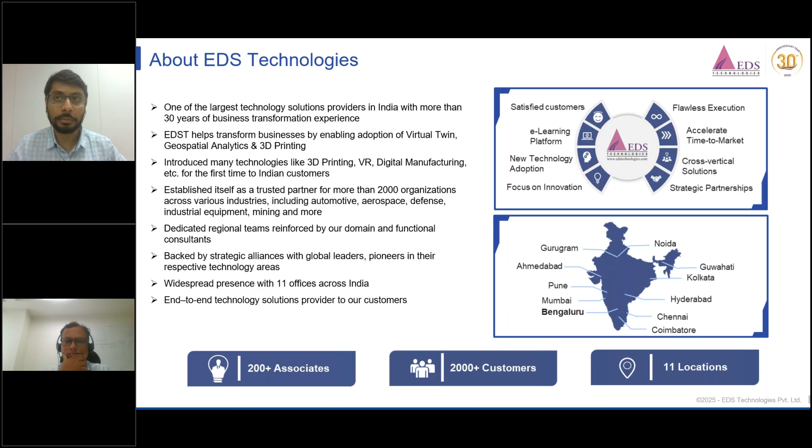This is a brief overview of our offerings as a company. We provide the 3D Experience platform solutions for 3D modeling, CATIA for 3D modeling, Simulia for engineering simulation, Enovia for enterprise collaboration, and Delmia for digital manufacturing.

We also provide RAMSIS, which is a software from Humanetics for ergonomics simulation, which is what today's webinar is about. And we also provide a product called QChecker for checking product data quality.

In addition, we also provide 3D printing solutions - metal, polymer, and electronics 3D printing solutions. Apart from that, we provide electronic design automation solutions and optical design solutions from Synopsys. We have mining solutions as well from Dassault Systemes, and military simulation and training solutions specifically directed towards aerospace and defense segments.

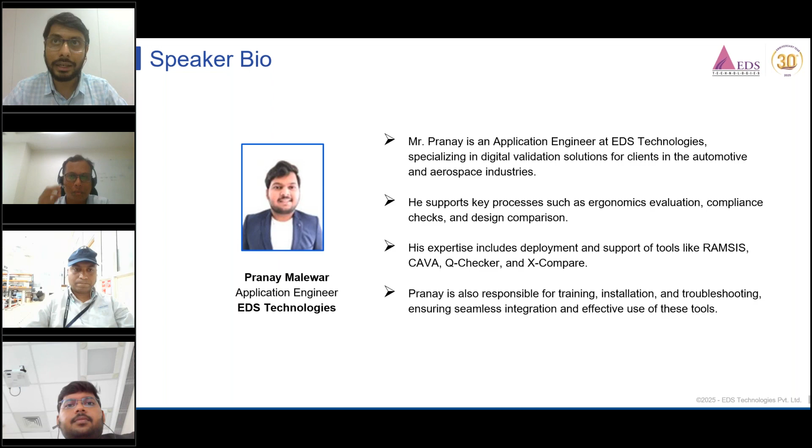We will also be having a demonstration of the RAMSIS application, which will be done by our next speaker, Mr. Pranay Malewar. Pranay is an applications engineer at EDS Technologies, specializing in digital validation solutions for clients in the automotive and aerospace industries. He supports key processes such as ergonomics evaluation, compliance checks, and design comparison. His expertise includes deployment and support of tools like RAMSIS, CAVA, QChecker, and XCompare. Pranay is also responsible for training, installation, and troubleshooting, ensuring seamless integration and effective use of these tools.

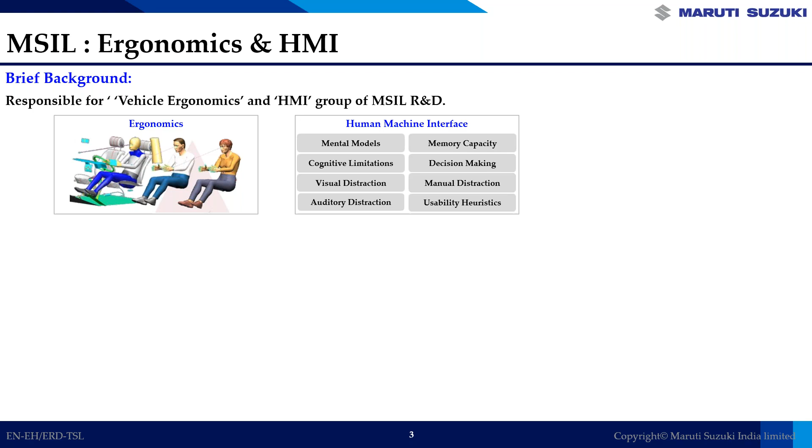My role is to define the ergonomics performance of a vehicle to ensure customer delight and joy of mobility. How do we do it? By maximizing the interior space and postural comfort and minimizing the physical and mental workload of a user.

As ergonomists in India, we are dealing with a unique challenge. We are the seventh largest country in the world, around 1.4 billion people from north to south, eastern to western border. The user anthropometry is different, food is different, culture is different, and all this diversity reflects in the behavior of the user.

And these behaviors affect the driving preferences or driving style of users. The people driving in the coastal area will have different driving preferences than the people driving in the Himalayan region.

Apart from this, there is unfortunately diversity in the road conditions also. There are world-class highways - we have Samruddhi Mahamarg and the Delhi Mumbai expressways - and there are roads which you can hardly call roads. They are bunches of potholes.

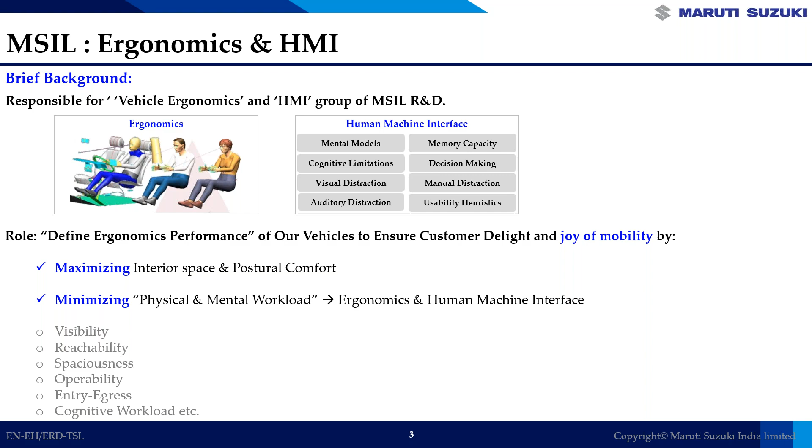So, how will we address these diversities? We are making in India, creating for India.

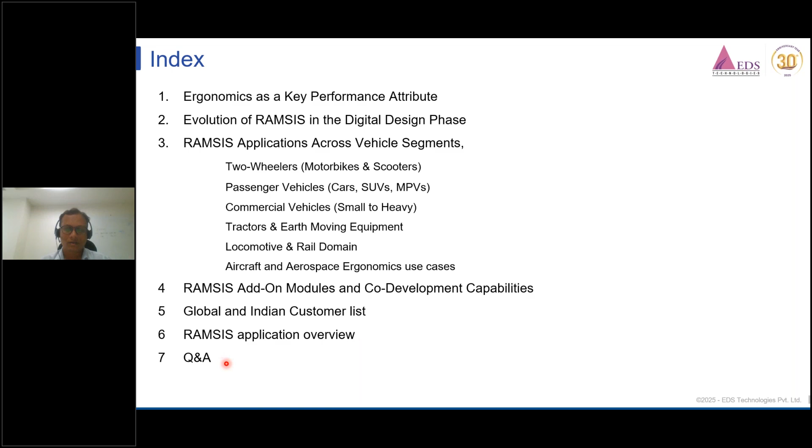So ergonomics as a performance attribute, why we have to treat it as a performance attribute. For example, RAMSIS is the most comprehensive ergonomic simulation software for the design of vehicles and aircrafts, which if deployed in the vehicle development from the initial studies may result in a lot of tangible benefits, like we can converge the solution quite quicker.

We can do quicker concept selection, choosing from many iterations, thereby developing shorter development times. We can understand and factor in ergonomic concerns very early in the development process, avoiding surprises in later stages. We can also save a lot of cost, as fewer physical assessments will be required.

Since we are working with realistic anthropometric data, we don't have to assume human sizes and proportions, because all the three-dimensional digital mannequins will be available for the studies. And thereby we improve product ergonomics quality and ensure customer satisfaction while driving the vehicles. So that is the final outcome.

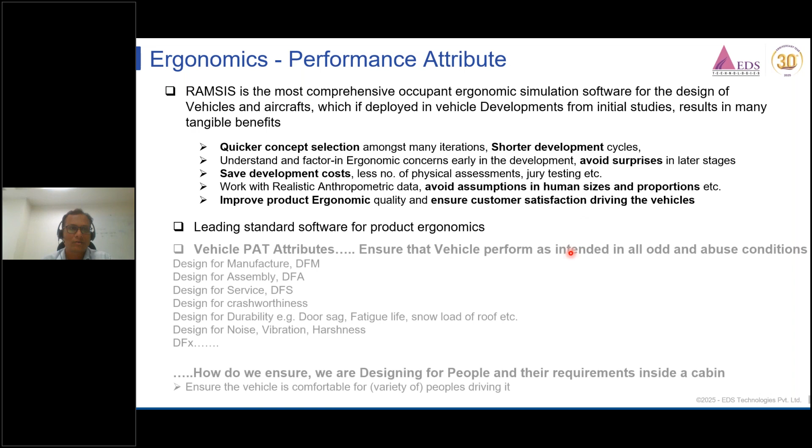To correlate why it should be considered an attribute, we have different performance attributes on the overall vehicle, a big list of attributes. These attributes ensure the vehicle performs as intended in all odd and abuse conditions, so that in any type of condition our vehicle should be able to perform. We achieve that by defining a lot of attributes.

Manufacturing, assembly, service, crashworthiness, durability, NVH, fatigue life, etc. These ensure your vehicle performance in real life conditions.

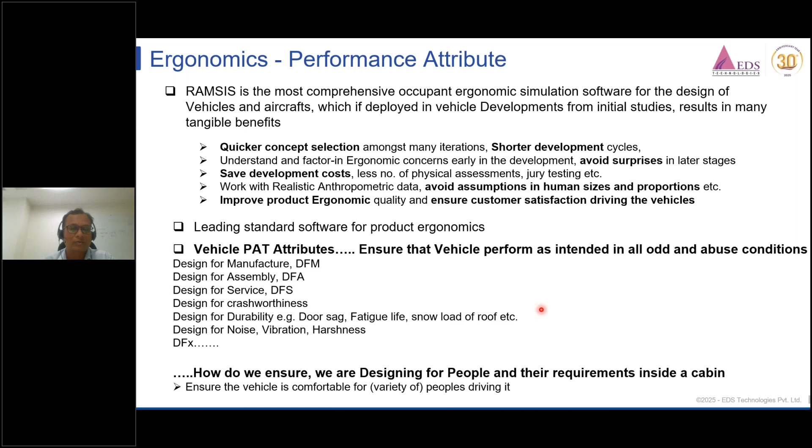But how do we ensure that the vehicle we are designing is for the people? People have different requirements inside a cabin. So for that, we have to study each and every activity inside a cabin from ergonomic principles, and thereby we improve our cabin ergonomics and give a kind of comfortable perception to the mannequin or to real life people. So that's where RAMSIS comes into picture.

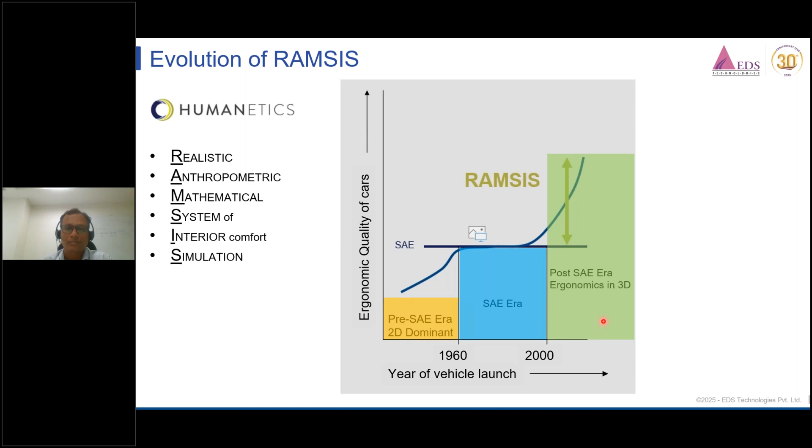Then we have the post-SAE era where we do ergonomics in the 3D environment, where RAMSIS comes into picture, apart from some other software. But RAMSIS, being the leader in the scenario, has dominated the market from the early 2000s.

So before that, we have to choose our customer who will be driving our cars or any type of vehicle. RAMSIS has many different anthropometric databases from different age groups and different reference years. It also has a secular growth phenomena where there's a database progression, allowing you to choose future mannequins for your studies. It also has an inbuilt bodybuilder module by which you can create your own custom mannequins, save them, and use them for your custom studies.

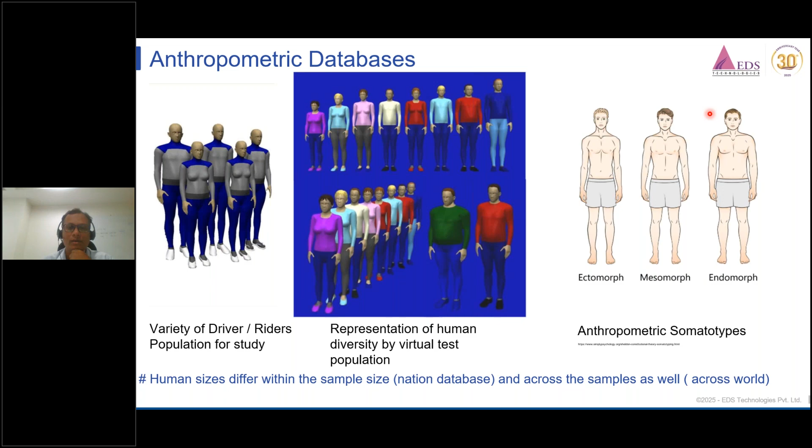The same percentile height-wise will vary in different sizes. We know it's a real life condition, but for which anthropometry do we define or design our vehicles is a question. So for that, we have to factor in all these ergonomic conditions into vehicle design, and this is all possible with RAMSIS.

Like I was saying, 'Make in India, create for India' is to identify through various research, quantify it through various tools like BMT and eye tracker—BMT is body motion tracker—and integrate all these assessments into the model development process.

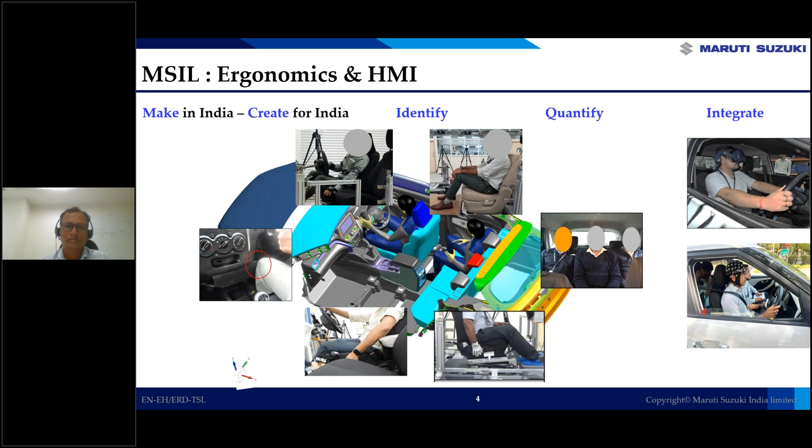So next I will be going into how the RAMSIS and MSIL partnership is going.

We had started using RAMSIS since 2012. It has helped us achieve two main objectives. Number one was the front loading of ergonomics input in the design.

This is the typical vehicle development cycle where we had quantified the ergonomics requirements, and for every vehicle we had given the targets from the advanced stage only, when advanced design is happening. So advanced ergonomics targets we provide, and then the ergonomics check happens.

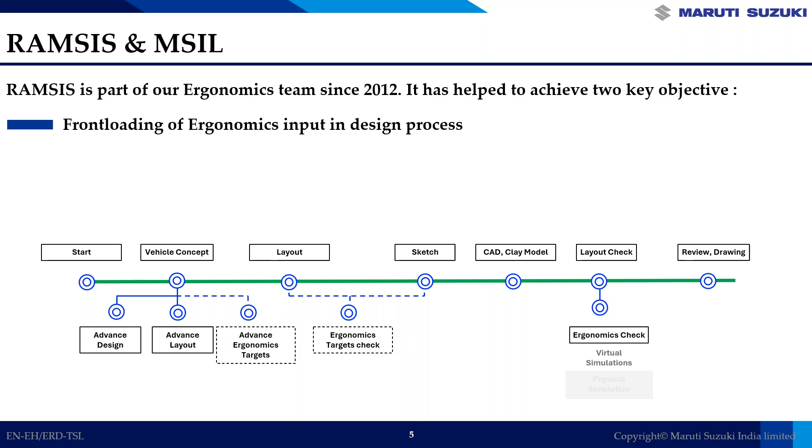Our aim is to eliminate this physical simulation. Earlier it used to happen, and we want to eliminate this physical simulation so that we can overall reduce the vehicle development cycle.

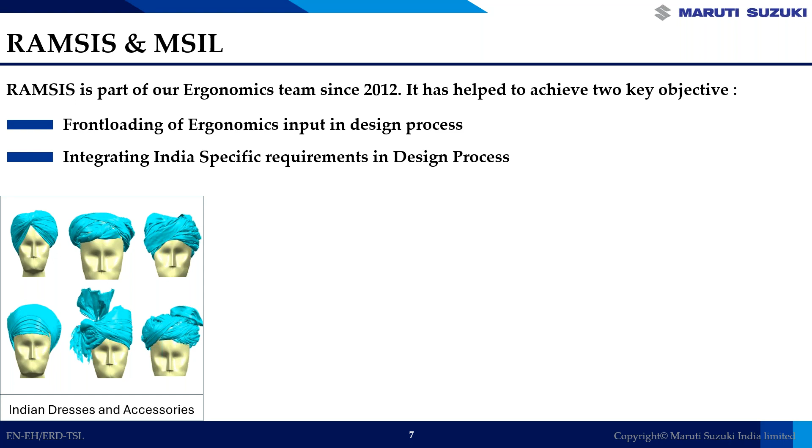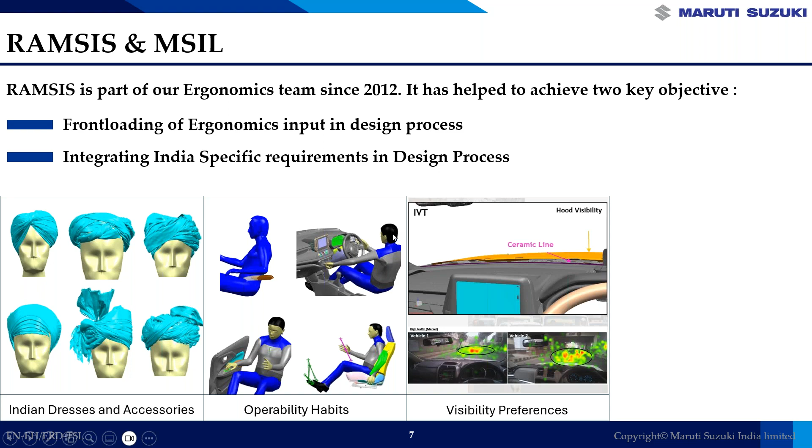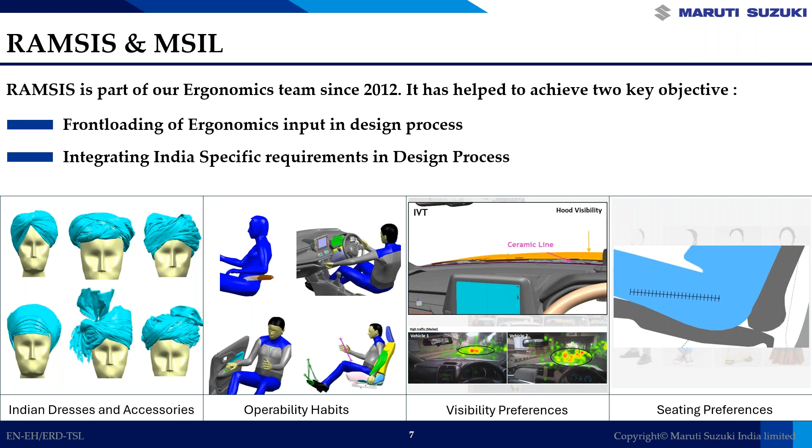Then integrating Indian specific requirements, there are many unique cases in India. Day driving conditions, night driving conditions are very challenging. There are some customs like turbans, which can be treated as part of the body because it is not a hat, you cannot remove it. Then there is user habit, how a user interacts with different controls, their operability habits, visibility preferences, how they judge visibility, and attires like lungi common in the southern side, jeans, t-shirts, coat-pant, saris, salwar. With every attire, the seating notch preference might change.

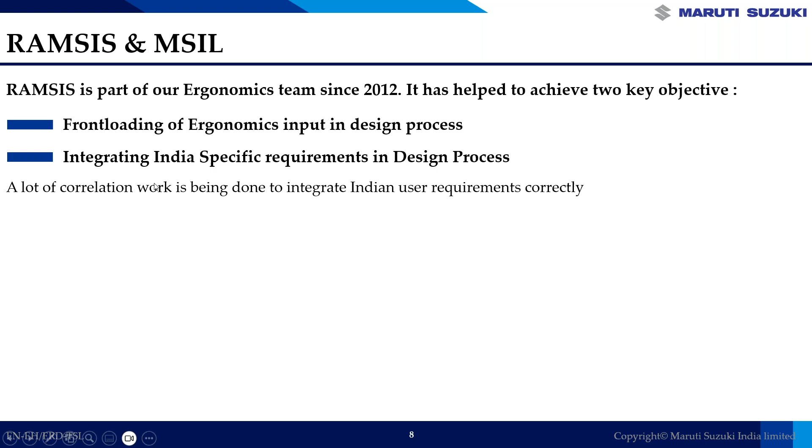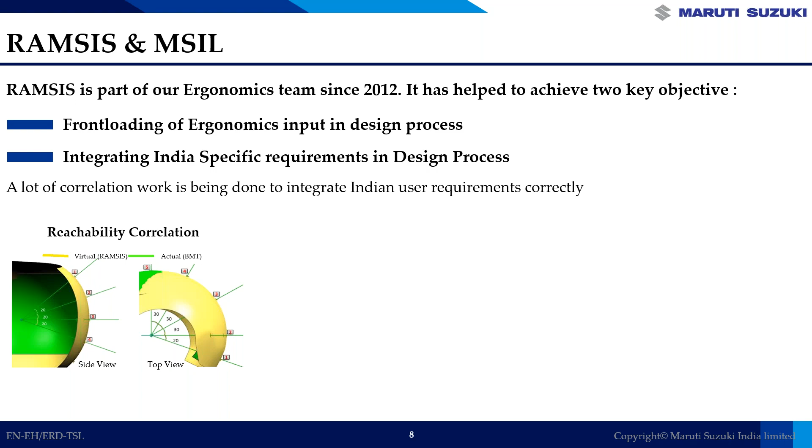So how we are adapting RAMSIS to Indian conditions is we have done a lot of correlation activities. One is reachability. Whatever we get in RAMSIS, it's not possible for any software to integrate the user habits or requirements of any other country. RAMSIS is developed in Germany. It's a great software with a very good interface. However, when RAMSIS was developed, it will have certain links from the German population. So making it adapt is the responsibility of Indian ergonomists. We create the leg envelope catering to the complete user habits and preferences.

Then visibility correlation — what we get in RAMSIS versus what we get physically. What kind of changes we can do in RAMSIS so that the result I get in RAMSIS and the actual will be the same. So all these things we are doing.

Which means, as I talked about decision making, the education level is different in India. So when we talk about Indian specific requirements, there is a mental workload point also that I had not covered. I want to emphasize again that mental workload is actually very underrated in India. The mental workload, the decision making varies. The horn, which we developed as a tool to communicate, will have a larger impact on our psyche, our temperament. So how we keep track of how user temperaments are changing, the ergonomist should develop digital screens also as per the natural decision making of a user.

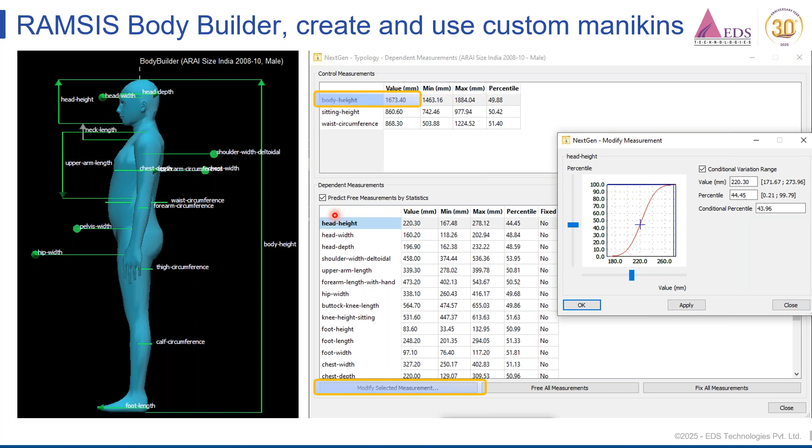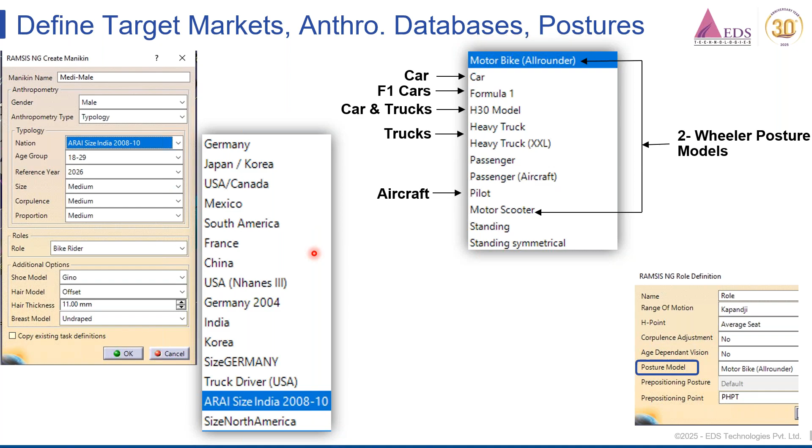Then we talk about databases — anthropometric databases, population databases — because country by country, nation by nation, people vary in sizes and proportions, and we have to factor in this variation in our analysis. So we choose different mannequins for Indian anthropometry. We have this ARAI Size India database, which is quite popular, but it depends on which is the target country and target market. Based on that, we can choose our databases and progress our studies accordingly.

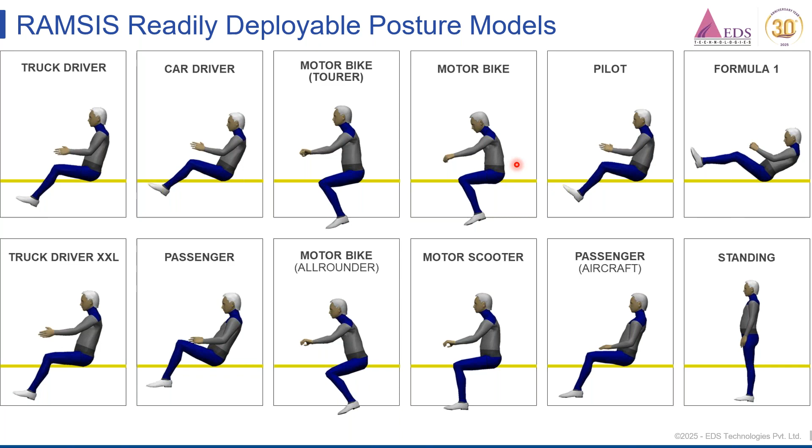To help the ergonomics engineer, RAMSIS has readily deployable posture models which can be deployed in the vehicle space without much effort. With just a few constraints, we can posture them inside, which can shorten the packaging time of the mannequin, what we call occupant packaging. This can be done extremely quickly in RAMSIS. Otherwise it takes days and days, and we are never sure that we have correctly positioned the mannequin in space.

That assurance we can get from RAMSIS mannequins. Once the mannequin is populated, positioned and packaged inside the vehicle space, we can carry out the intended ergonomic activities that we would perform had this been a physical vehicle.

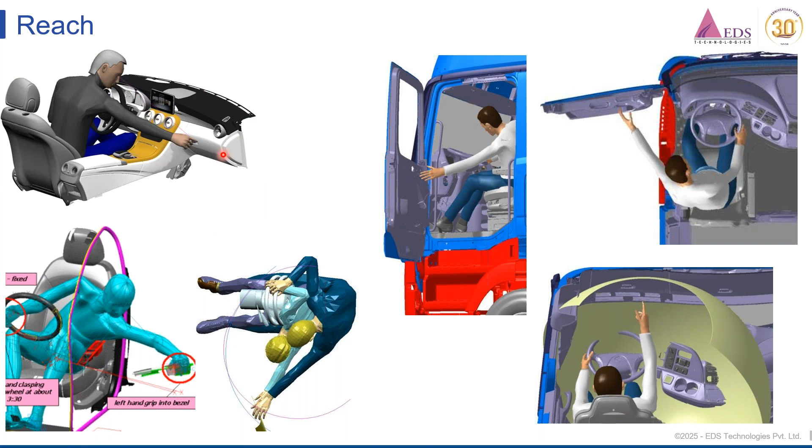So we can perform the co-driver side glove box unlatching, door grab handle pulling and pushing. For different varieties of mannequins, we can try that activity to see if it's reachable or not. For truck scenarios, we can study the reachabilities because the size of the apertures are quite big in that location, and we can compute the maximum reachabilities in RAMSIS to know what are the reachable areas by the mannequin. These are very important surfaces and envelopes for studies.

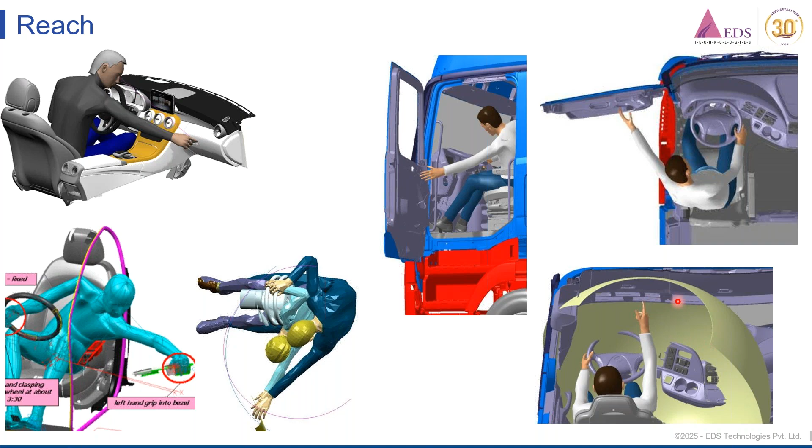Once tactile studies are done, we can start with the vision studies where we can compute the acuity and readability of the characters on the instrument cluster, whether they are readable by a certain group of people or not. That readability study we can perform in RAMSIS. Cluster and steering wheel obstruction onto the cluster or dashboard can be effectively studied with RAMSIS.

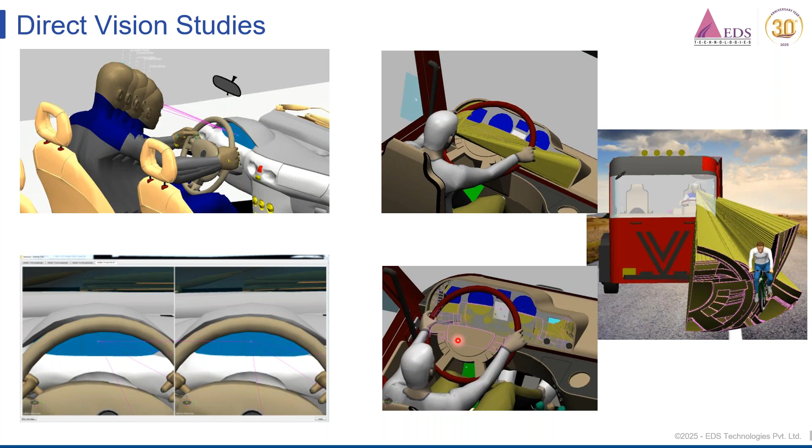The blind spot or A-pillar obscuration and blind spot analysis we can do in RAMSIS. It's very much possible - you see here the hub of the steering wheel is blocking most of the area of the cluster, which is not a good condition. It becomes even worse when we have a tilt and telescopic mechanism in the steering wheel, so we have to factor that in the studies too. We can do that with RAMSIS.

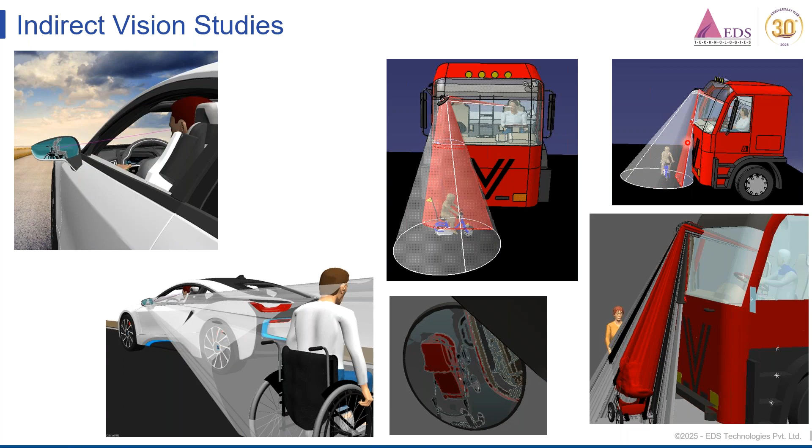Then there are some indirect vision studies, for example the ORVM studies. We can see the rear world imprinted into the mirror glass here - what is the real life condition? For trucks, where visibility is more compromised, we can study the mirror positions and curvatures and see whether the rear visibility is quite good and there is no blockage from the vehicle structure toward the visibility.

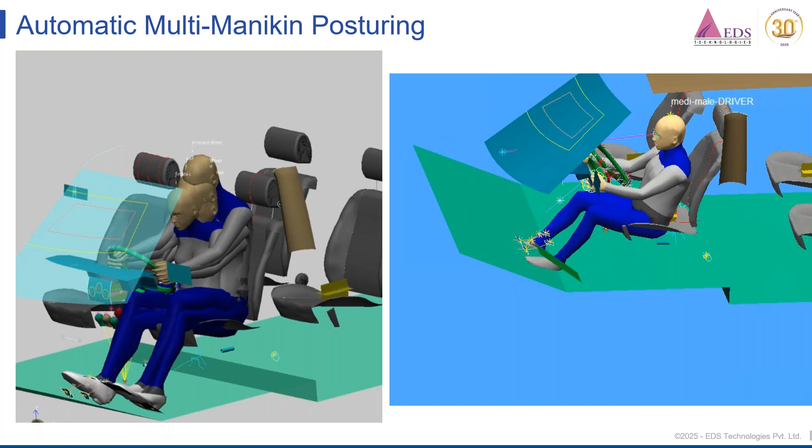RAMSIS also has automatic manikin posturing. We can place n number of manikins inside and study their behaviors, and with automatic posturing, very quickly we can position the manikin. This is a slow simulation - it's a driver getting positioned and then getting moved into the cabin space automatically. This can be performed very quickly in RAMSIS with no big effort and no big intelligence required. This is called automatic posturing, which is possible for the driver and for the rest of the passengers also.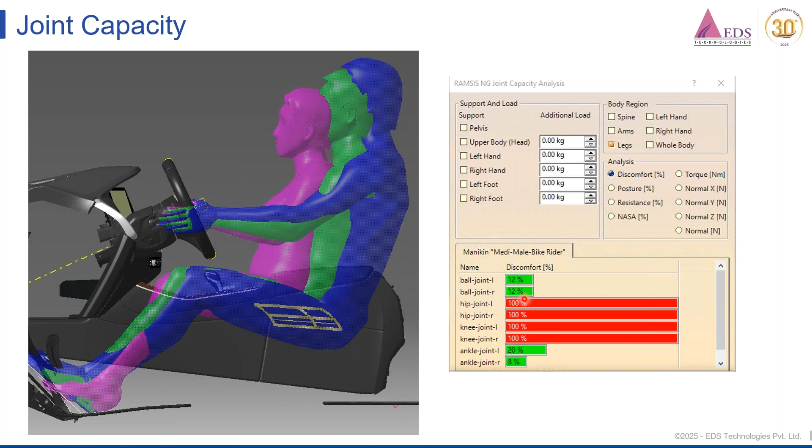Joint capacity again is one of the best features of RAMSIS. Every joint in the body has some usable range of motion, and there is a certain part of the range which is not usable. So as and when we move towards the extremes of the usable range, we feel certain discomfort. That is also one of the parameters by which we can study discomfort. For example, here the leg region is being studied, and definitely his hip region is in bad shape. So we have to analyze and solve this condition, and this joint capacity helps a lot in terms of analysis.

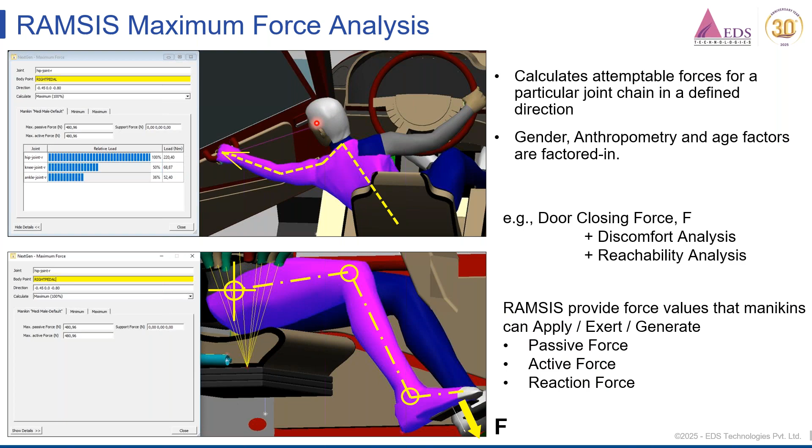Again, you can compute the maximum forces that a mannequin can generate, be it a small female or a tall male, any variety of population. RAMSIS can tell you how much force he or she can generate at the palm in this position, based on body strength. This can be studied and objective values are available. This can be a good value to further engineer maybe the door bushes, the hinge axis, or hinge separations, etc.

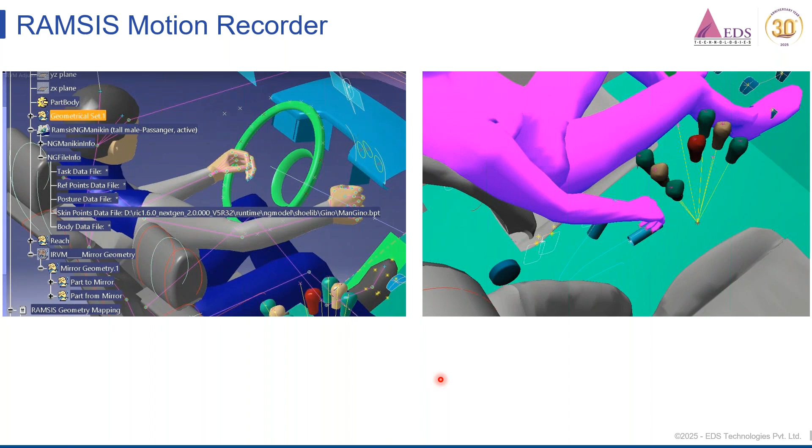By default, RAMSIS has been provided with a motion recorder by which any study that you do, you can record the motion in terms of an AVI file, which you can keep as a record. If you happen to go to management meetings to justify your design selection, you can produce these recorded movie files as proof of your concept selection. Then your concepts can quickly get selected and you can move on for further development.

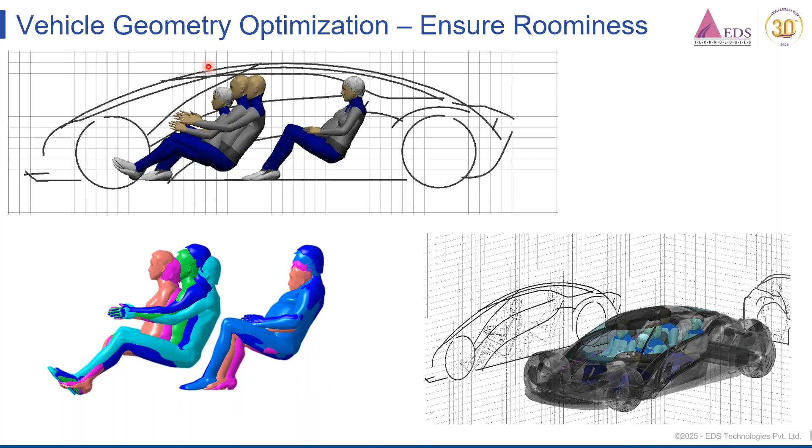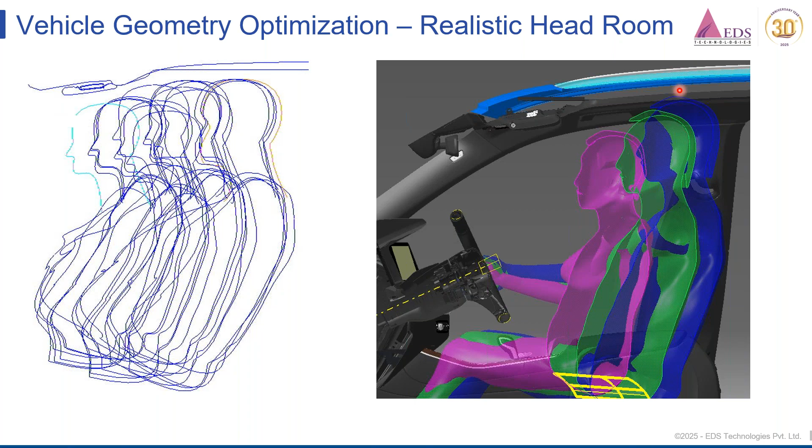Once the mannequin is seated, this can be performed in very early phases where there is no CAS, just the R point and the vehicle outline. Then we can populate the whole virtual cabin space with many test populations, which will eventually drive our vehicles, and study the overall layout from these population databases. There is no technical need to use the SAE-J standard for headroom calculations, but since a realistic head population is available, we can set our roofline quite nicely, not too high or too low, with optimal clearance around the head.

From that we can also do cabin interior activities like cup holder reaching and knob pressing, etc. All that is possible. The reach, the grip location, and out-of-cabin activities like cargo loading, leaning, trunk top opening, or reaching the latch. All these non-driving activities are possible with RAMSIS.

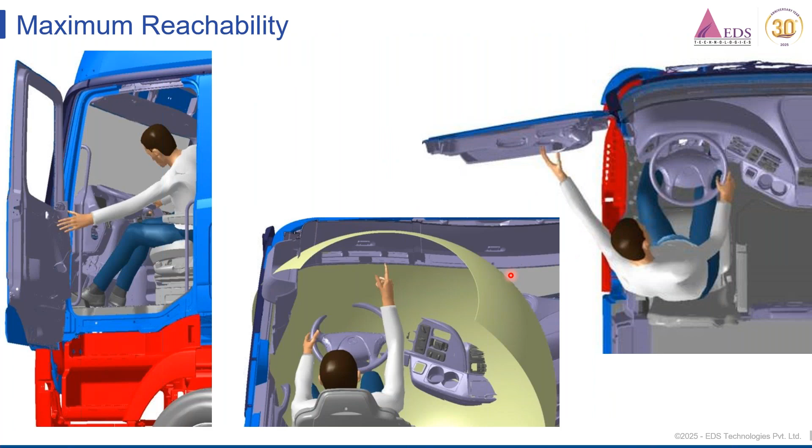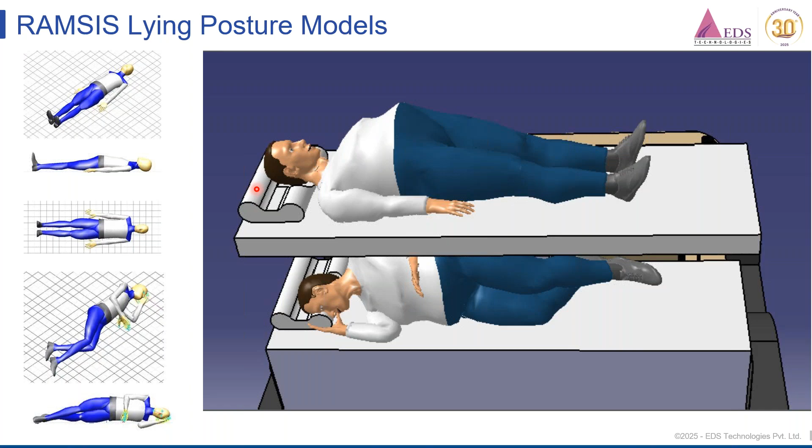Regarding commercial vehicles, we have some posture models readily available. In commercial vehicles there is a lower berth and an upper berth, where the co-passenger usually sleeps while the driver drives, and they change roles accordingly. These ready-made posture models let you see their reachabilities and visibilities. If convenience factors need to be considered around them, we can study that detail as well with these posture models.

BMW is actually a global customer of RAMSIS in Europe.

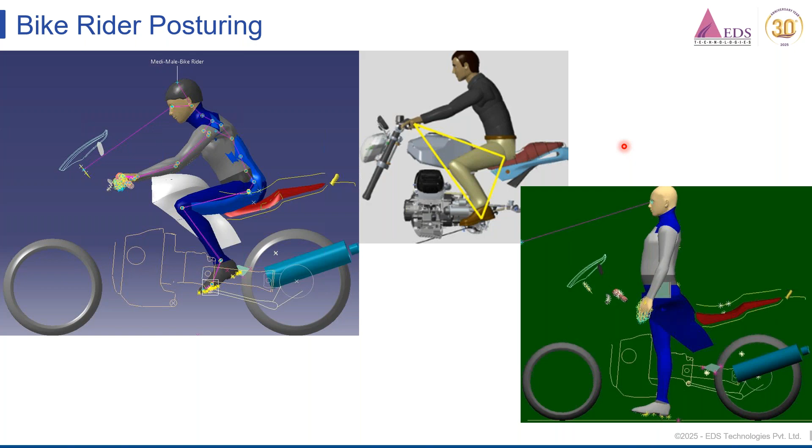Once the mannequin is postured equally like in a car, we can also posture them equally on the two-wheeler, bike and scooter space. Once it's populated, we can study their thumb reachability, finger grasping, and thumb-finger reachabilities. By that, we can set the nominal position of the clutch lever, once we know the reachability of the fingers.

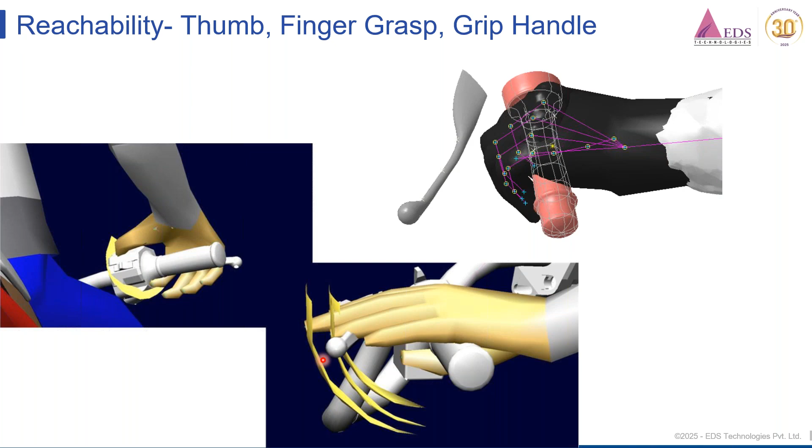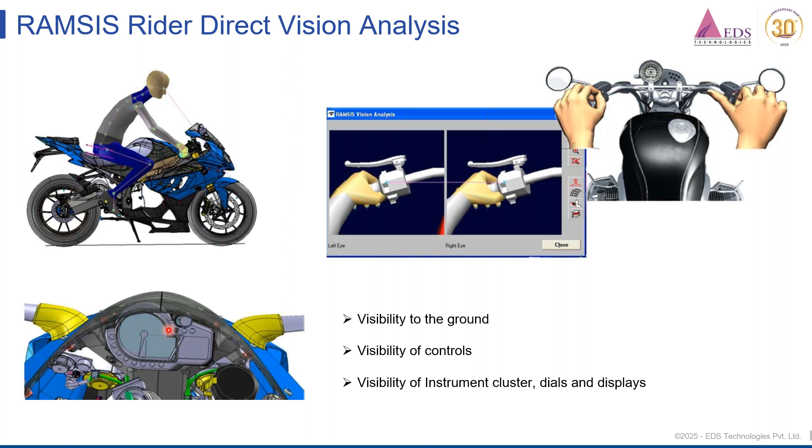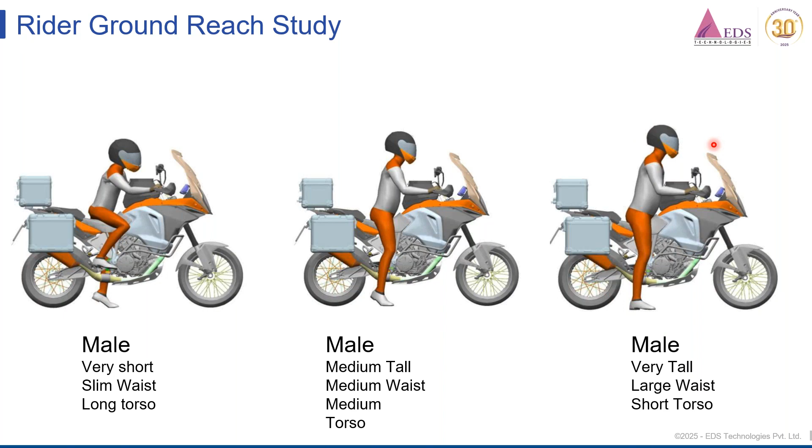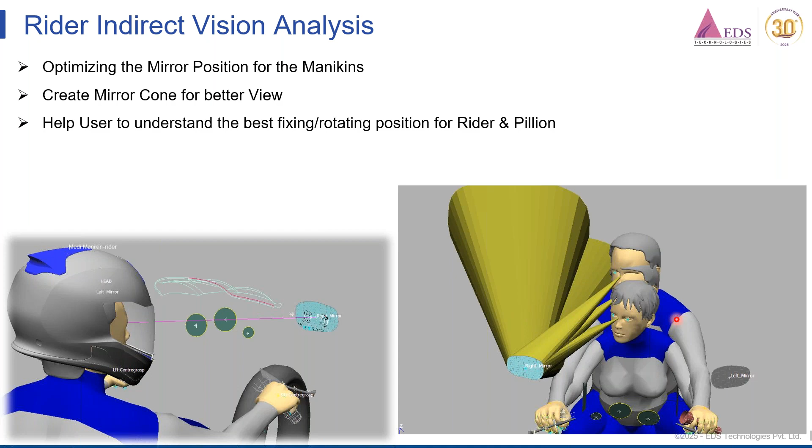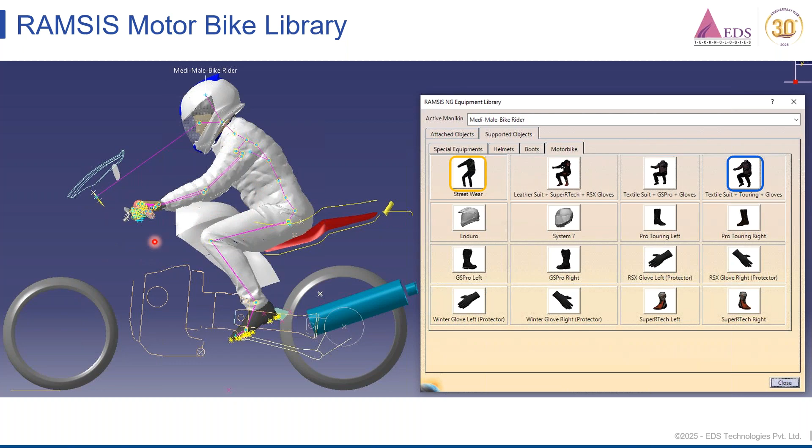RAMSIS also has a two-wheeler motorbike library, which we can put on the mannequin with realistic appearances - clothing, jackets, helmets, shoes and trousers - so that we give a realistic feel. Apart from that, they also put on some packaging clearances around the mannequin, by which we can study our vehicle structure and improve the scenarios. In a click of a second, we can toggle between the two appearances here and see which is the worst. We can also choose between different helmets.

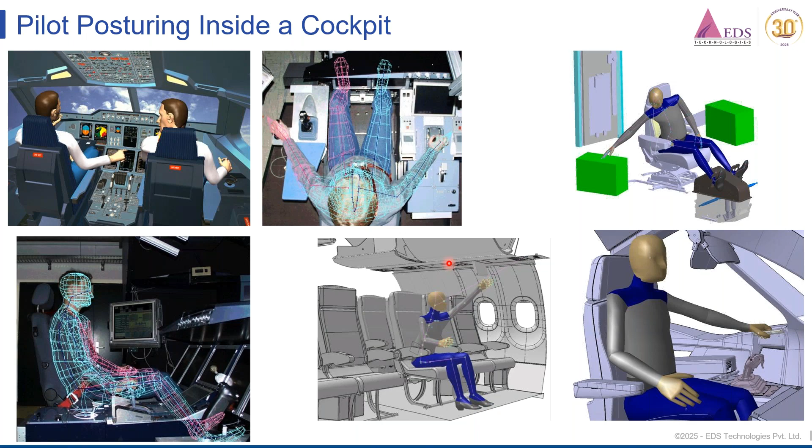We can position this typical populated mannequin inside a cockpit, but any small control can be there too. We can study the reachability, grabbing, and while operating, whether the hand is clashing with some other hardware or not - is there ample clearance between that. All these studies can be done and we can improve upon them. Otherwise, these will be surprising elements once the vehicle is made, once the aircraft is in production.

Apart from that, direct visibility can also be performed - we can study direct vision, the road and ground visibility, just like we do in cars. But apart from that, reflection studies can also be done. It's quite a cluttered cockpit region here, so all controls can technically reflect onto the windshield, which is not a good scenario. Once we study them, we can position the controls in such a way that they at least go out of the most visible zone on the windshield, and we can do some intelligent engineering here while packaging.

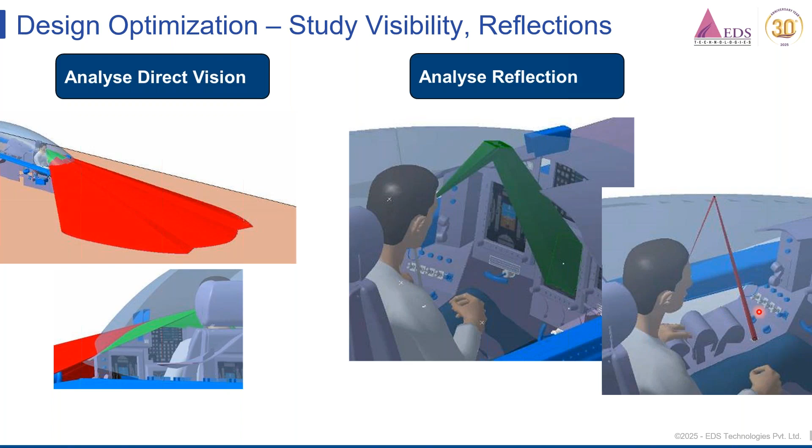Just like aircraft, we also have use cases for tractors globally and in the Indian scenario. A lot of OEMs use RAMSIS for tractor ergonomics. It's very pathetic for tractors because very less emphasis is given to ergonomics and comfort of the operator. The seat doesn't totally cover the back region because the driver is not meant for comfort, he's meant to work.

But at least we can make certain improvements in his cabin so that he feels some comfort operating the levers, holding the steering wheel, operating the AC controls and other controls around the operator. We can study through RAMSIS and give some additional comfort to tractor operators this way.

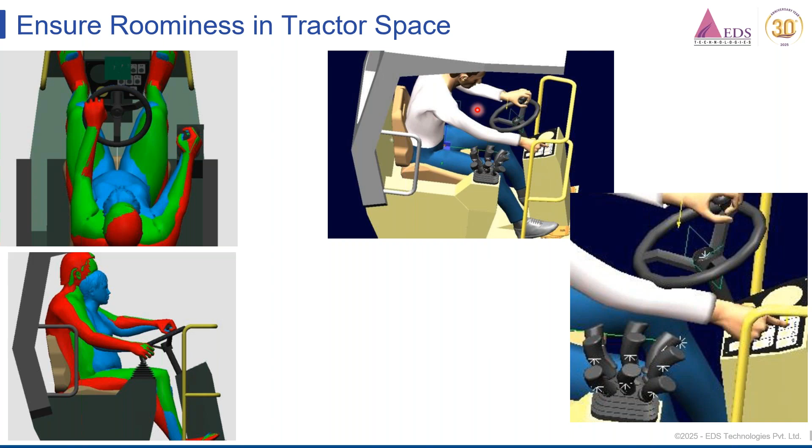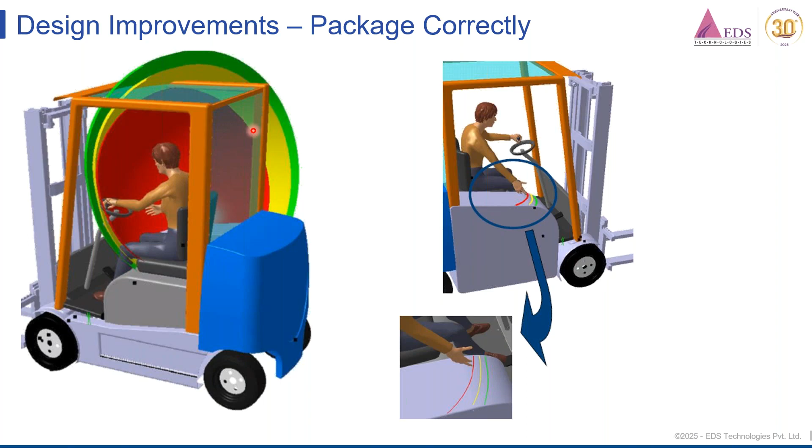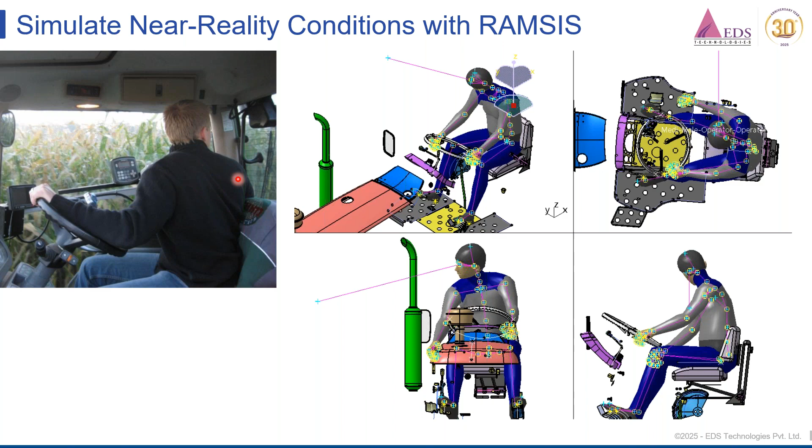The looking-back condition is most frequent on farms and for the tractor industry. We can simulate such conditions and make the mannequin look sideways, rearwards, or downwards, and see what he's able to see. Certain real-life conditions can be simulated through RAMSIS. This was part of our project, and this is a real-life scenario, so we can technically simulate near real-life conditions in RAMSIS.

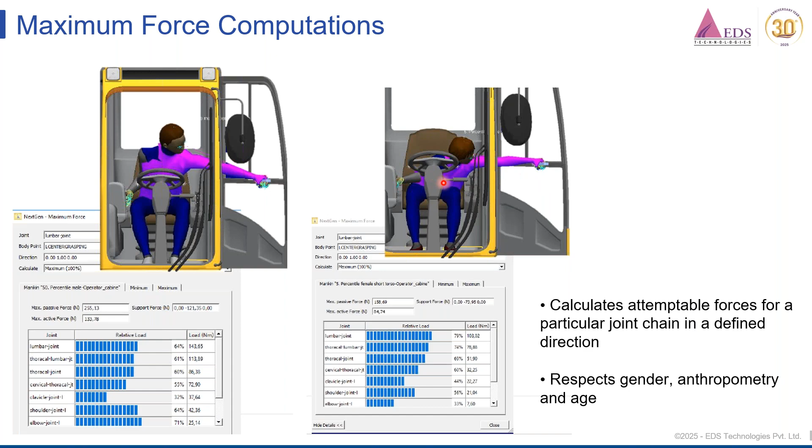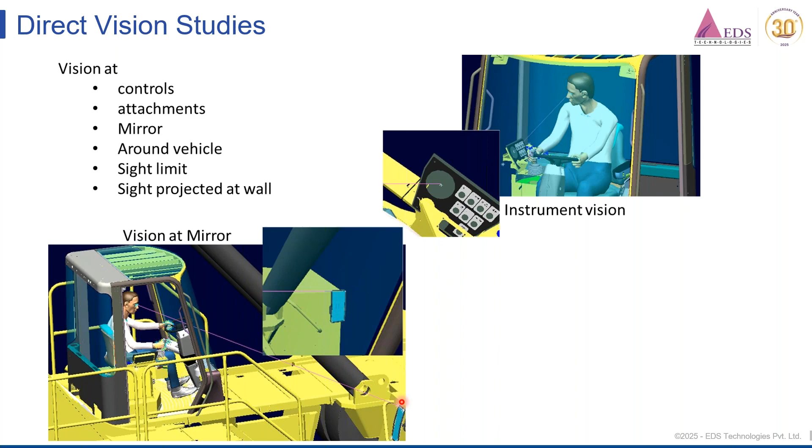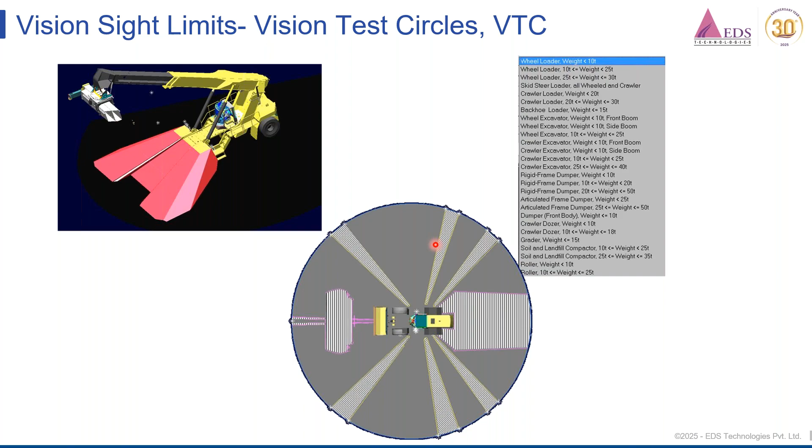Again, this VTC, what we call vision test circles in the tractor industry or earth moving industry, we can study that. Ingress and egress can also be studied quite easily with RAMSIS.

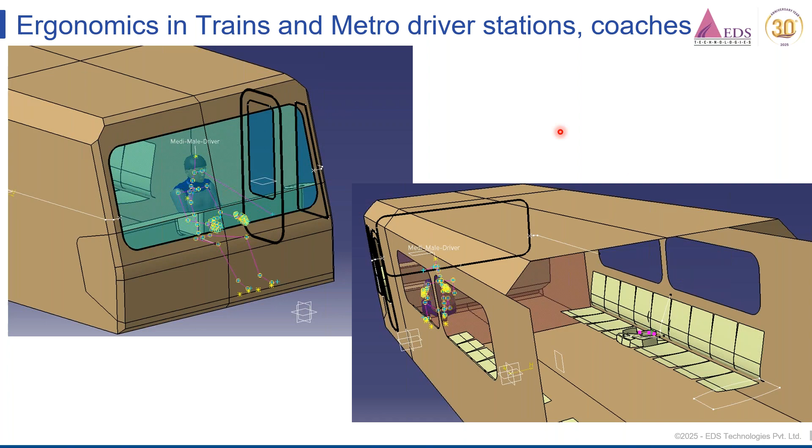Also, for the locomotive industry, a lot of global OEMs in rolling stock, metro, and train coaches use RAMSIS for ergonomic analysis, because the cabin space and driver station are fully filled with real people. We have to simulate that quite critically, and I'm sure we can come out with interesting studies if some OEM proposes that we study their cabin with the help of RAMSIS. We are more than happy to assist, because I'm sure we can find good insights with RAMSIS.

RAMSIS is also a big part of seating design. We can technically fit our seats and model manikin-to-seating-foam interactions in a decent way. There's a module in RAMSIS called seating design, by which you can engineer seat contours and foam bolster sizes, etc., having known the population sizes that will possibly drive the vehicle, so we can engineer seating contours, thigh exit lines, and usable headrest height adjustment.

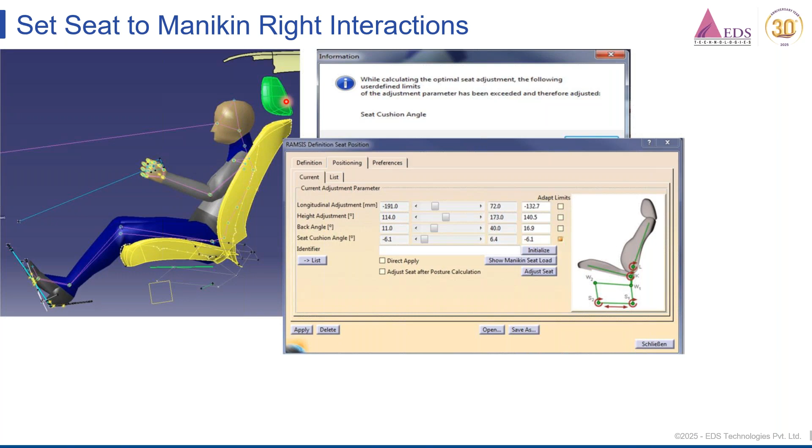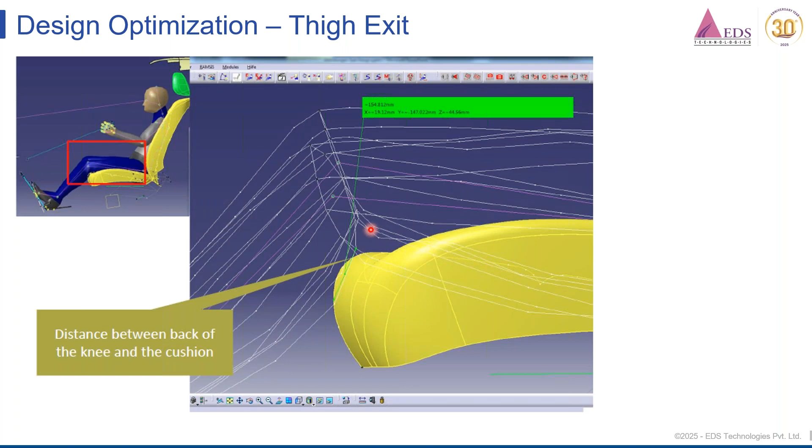This is the thigh exit line, which we can study. Too much thigh exit, too much thigh support, or too little thigh support are all bad. We have to have optimal thigh support, which we can study with the help of RAMSIS. We can also study usable height adjustments of the headrest up and down, and the contour of the headrest.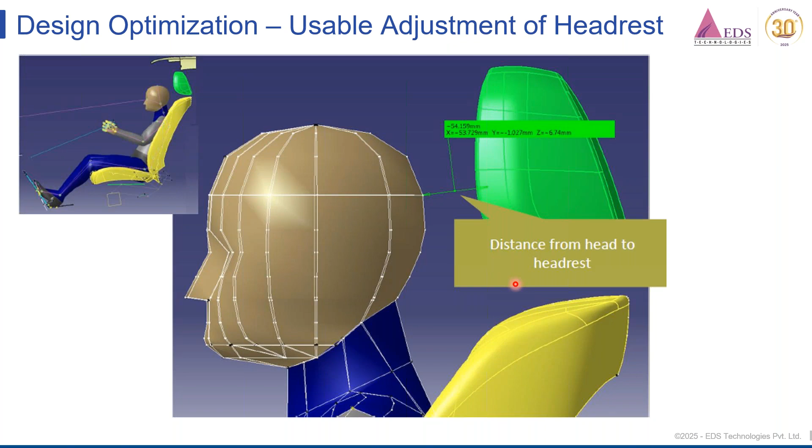Apart from RAMSIS, there's also seatbelt simulation software that can be studied. We can populate the RAMSIS mannequin and study the belt routing over it. We can also study belt routing over certification devices called EBTD, and crash dummies like Hybrid, Thor, and child dummies can have their routing studied with the help of RAMSIS.

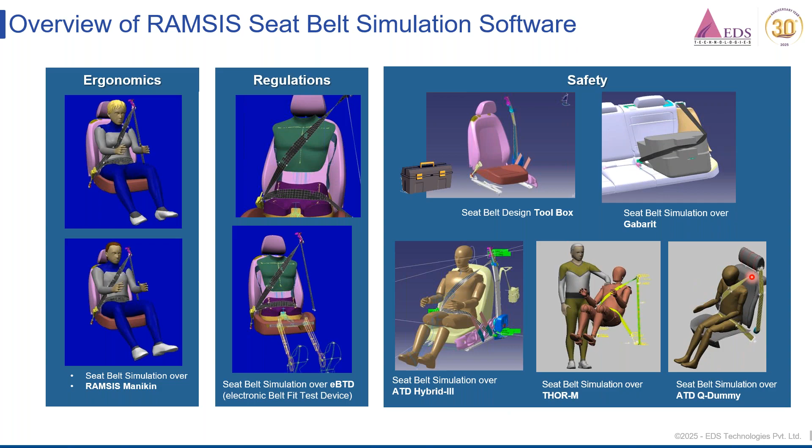RAMSIS, while simulating, generates belt routing and also gives a shoulder scale that reflects the bone, over which the belt should route technically. Too close to the neck is dangerous, and too far away is also dangerous, so we have to route the belt so it passes through the midway of the shoulder scale. We can study that and then position our anchorages accordingly.

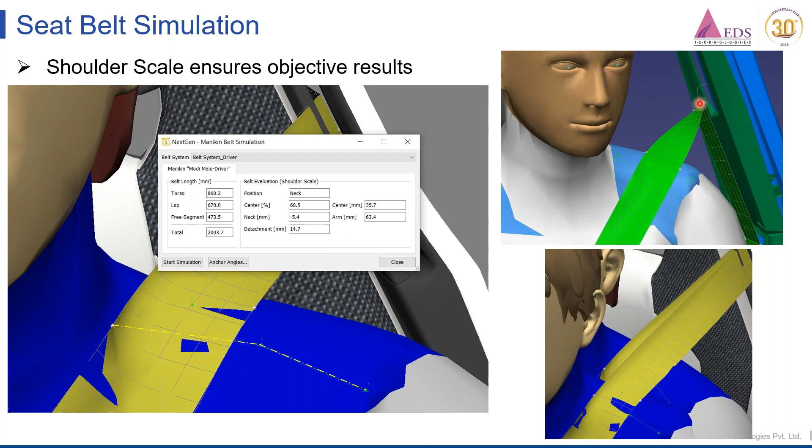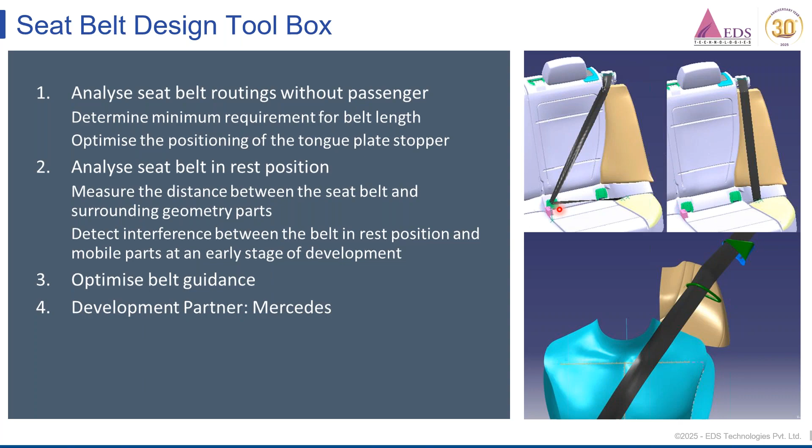Second row belt can also be studied, as well as unbelted situations. Also the hardware, the buckle, can be studied because it can protrude into the human flesh and muscles, so we have to package it correctly and intelligently. This can be studied with the help of RAMSIS.

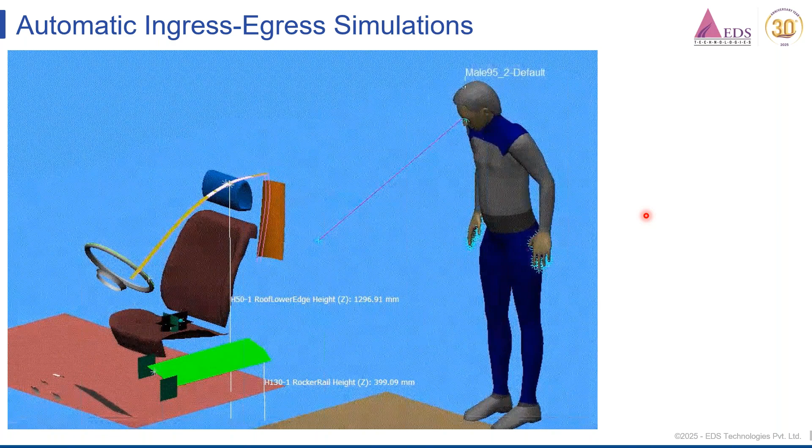I think this is the last slide - automatic ingress egress. Ingress egress is a very critical function in vehicle ergonomics, where most of the perception of the mannequin is set. In RAMSIS we can study the mannequin's ingress egress quite automatically. There is a new module by which you can simulate the complete population's ingress egress into the vehicle space, and study their joint angles, discomforts, clash and clearances, and the overall discomfort they might be feeling during the whole ingress action. This is a typical passenger car ingress egress.

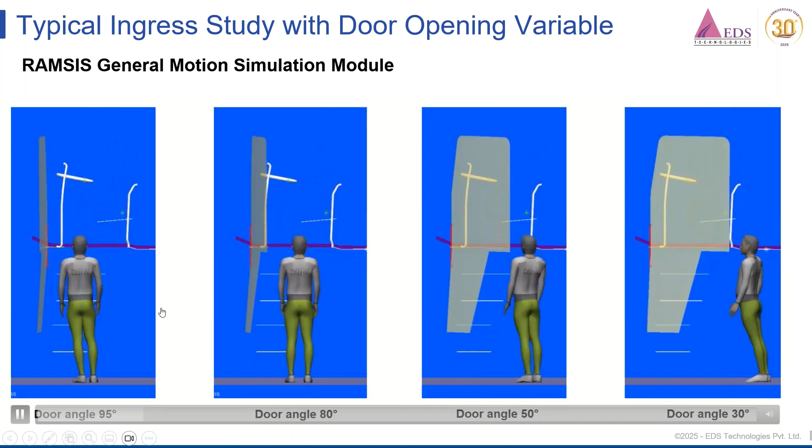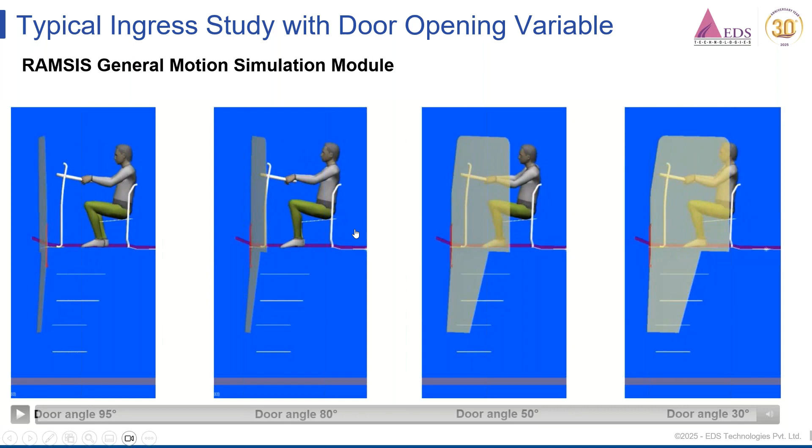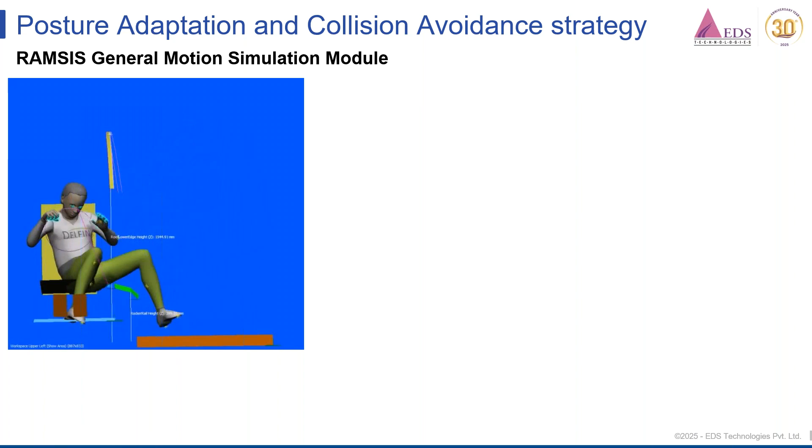It works on collision avoidance. Whatever hardware we give it - the floor, the sill area, and the roof line - the mannequin respects that hardware and avoids it while trying to get inside the vehicle. This is called a vehicle collision avoidance strategy.

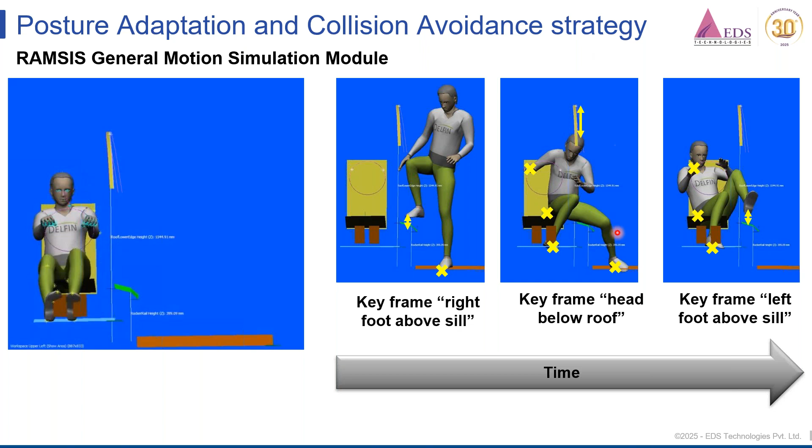It's a classic example of commercial vehicle ingress egress, by which we can study the joint angles over the time frame as the mannequin gets inside the cabin. It's a commercial vehicle respecting the footsteps of the vehicle.

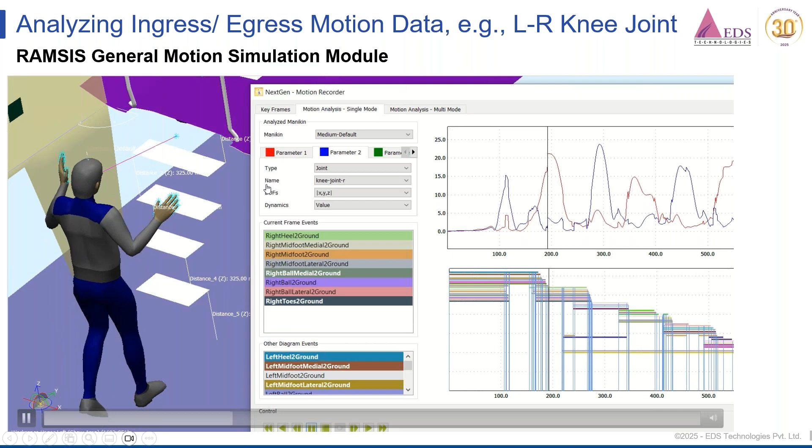Let's move ahead. I think that was the last slide from my side. I may have slightly gone over time, but it was required.